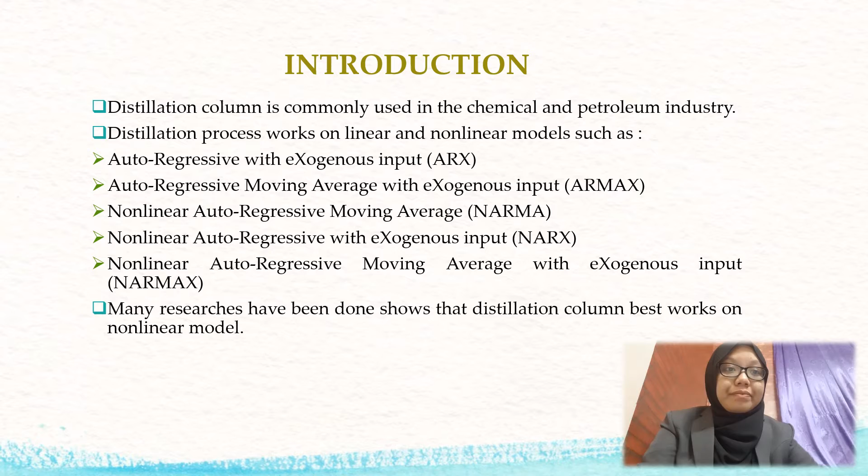Time-varying dynamic behavior is an increasingly essential field that has been developed for the non-linear and time-varying model for water temperature. It helps in prediction of the estimated accuracy.

The choice of input data is PRBS, pseudo-random binary signal, as it has a full spectrum of amplitude and frequency. Second is the multi-sine signal, M-sine, because it is sensitive and can detect small changes that occur.

The PID controller performance depends on its three tuning parameters, which are proportional, integral and derivative, to reach the transient response performance and robustness. Therefore, PID controller is implemented in the non-linear model for time varying to achieve the conventional control.

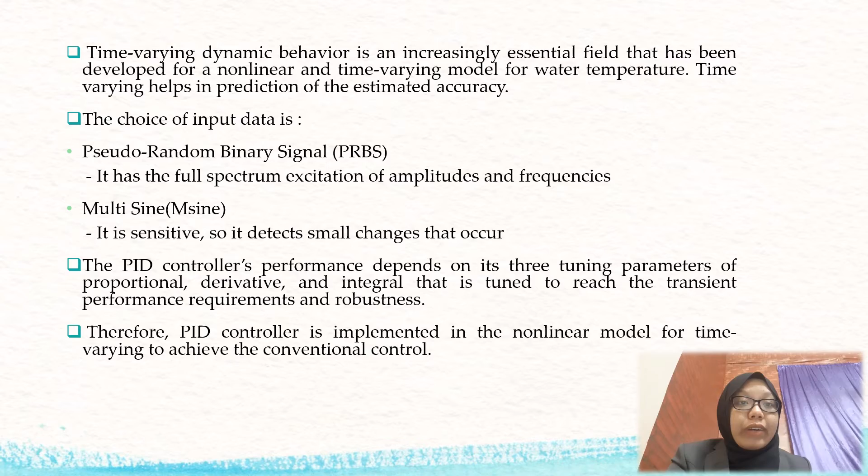Problem statement. It has been discovered that non-linear models give better performance and greater presentation compared to the linear model. Unfortunately, there are some drawbacks due to the validity in the input set with the use of a non-linear system linear method.

The time-varying distillation column is a device that has non-linear behavior and faces critical problems such as loss detection that cause it to be hard to explain the physical mechanism.

The distillation control also faces some problems and limitations such as difficulty in controlling the process and unsatisfactory control performance. Therefore, analysis on the NARX model of steam distillation process has taken place.

The implementation of PID controller is used to control the non-linear system and demonstrate the high controller performance of this project.

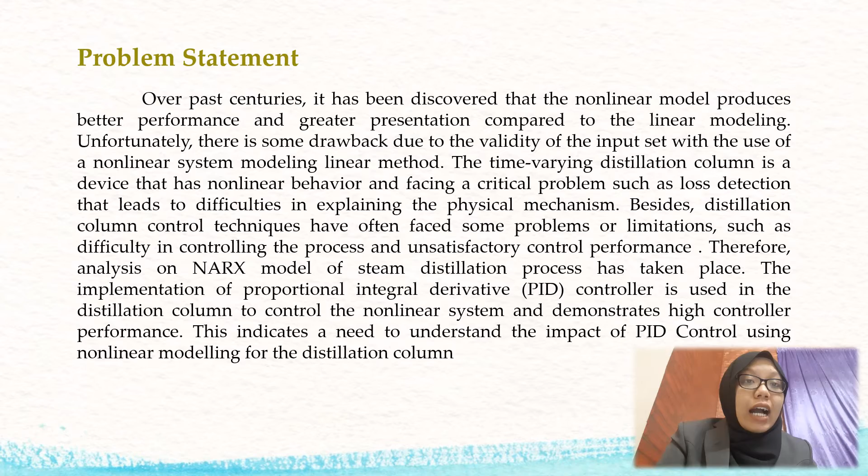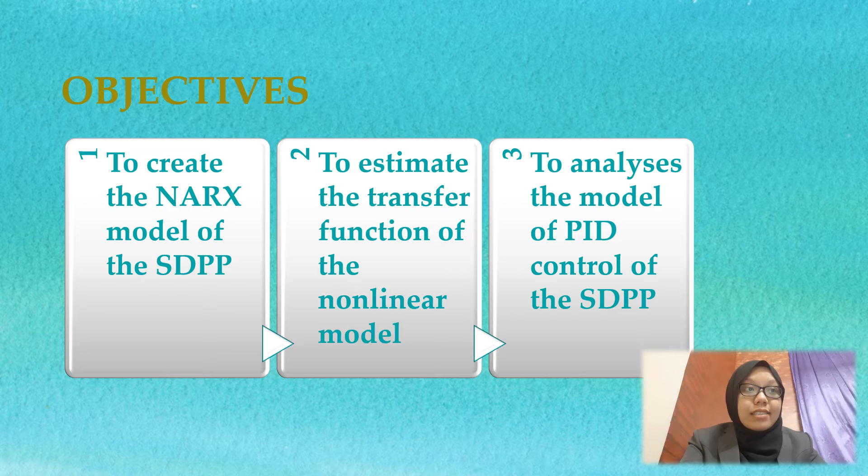The objective of this project is to create a NARX model of SDPP. Next is to estimate the transfer function of the non-linear model, and lastly to analyze the model of PID control of the SDPP.

For the methodology part, as you can see, there is a flowchart above. After start is experiment planning. Next is data collection, in which we obtain the highest best fit of the input data of each input. Next is selection of model structure by using the reformulated tangent method.

Next is model estimation of the transfer function to be used on the Simulink. Next is the model validation, in which we identify the value of Kp, Ti and Td from the transfer function, and if the model is accepted, implement the PID control so that the final result we obtain the rise time, settling time and percent overshoot of each input data.

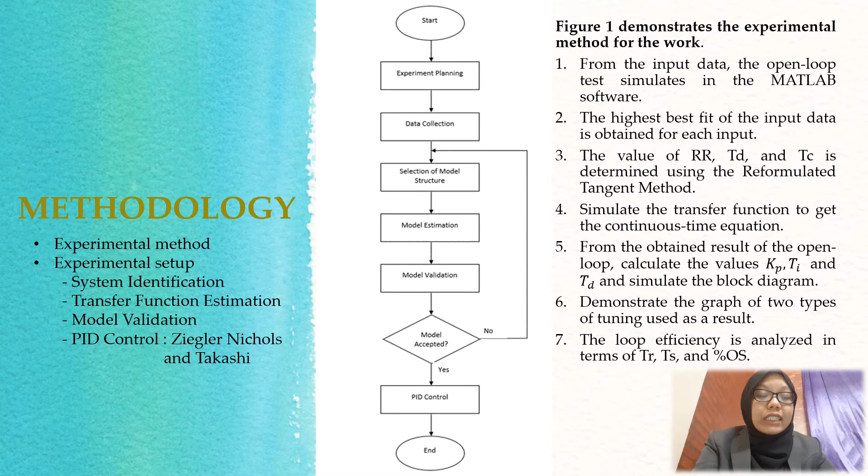For experimental setup, a steam distillation power plant SDPP with 240 volts was used with a specific sampling time for the immersion heating feature. The MATLAB software was used for plant integration and data collection for modeling purpose.

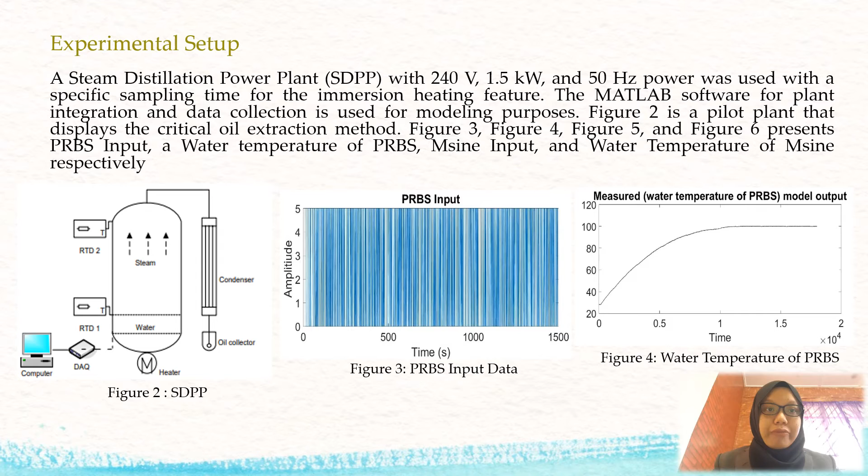Figure 2 is the SDPP plant that displays the critical oil extraction method. Figure 3 shows the PRBS input data graph, while Figure 4 shows the water temperature of PRBS graph. Figure 5 shows the M-sine input graph, and Figure 6 shows the water temperature of M-sine graph.

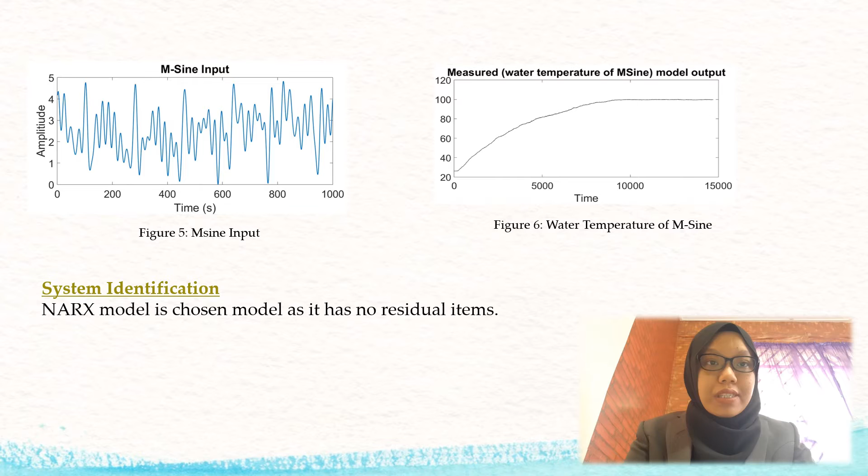For system identification, NARX model is the chosen model as it has no residual items.

For the transfer function estimation, the transfer function is estimated from the input time domain. The number of poles and zeros is adjusted several times in the system identification apps so that the simulated transfer function is in the right form. After that, the fitness percentage will be obtained, and lastly, the equation of the continuous equation will be obtained to use on the Simulink block diagram.

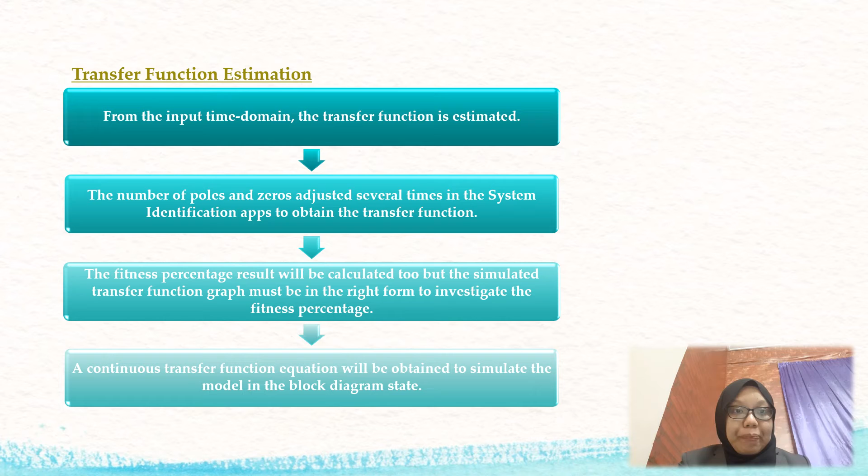The result was divided into 5 parts: the best fit and MSE result, the calculated transfer function, the graph of PRBS input, the graph of M-sine input, and lastly the tuning parameter result.

Here is the table of calculated transfer function values of Kp, Ti, and Td. The calculated values are obtained by using the Ziegler-Nichols tuning rules and Takahashi tuning rules at table 1 and 2 from the previous slide.

This page shows the graph of simulated PRBS input data. Figure 7 shows PID control PRBS input 0.1 for steam temperature graph. Figure 8 shows the PID control PRBS input 0.5. Figure 9 shows PID control PRBS input 0.8 graph.

From the PRBS input graph, it shows that the least amount of overshoot is on Takahashi with 0.5 band, and the fastest rise time is at Takahashi with band 0.5.

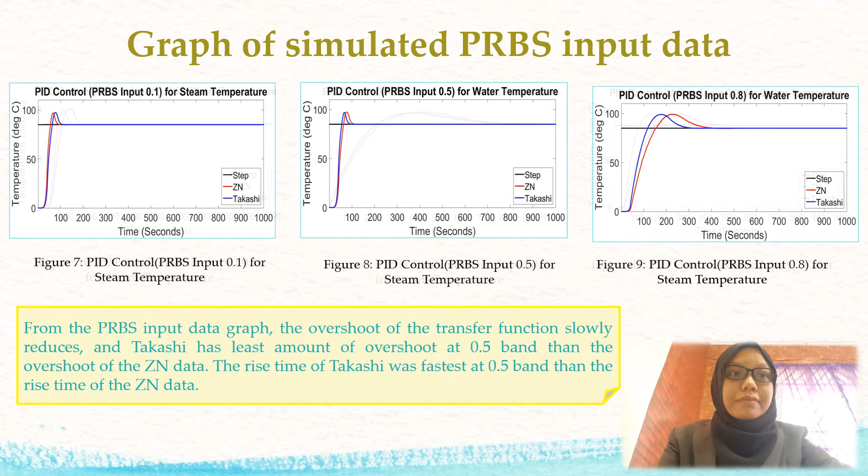Here is the graph of simulated M-sine input data. Figure 10 shows the PID control of M-sine input 0.1 for steam temperature graph. Figure 11 shows PID control M-sine input 0.5 graph. Figure 12 shows PID control M-sine input 0.8 graph.

From the M-sine input data, the least amount of percent overshoot is on Takahashi with 0.8 band, and the fastest rise time is at Takahashi with band 0.1.

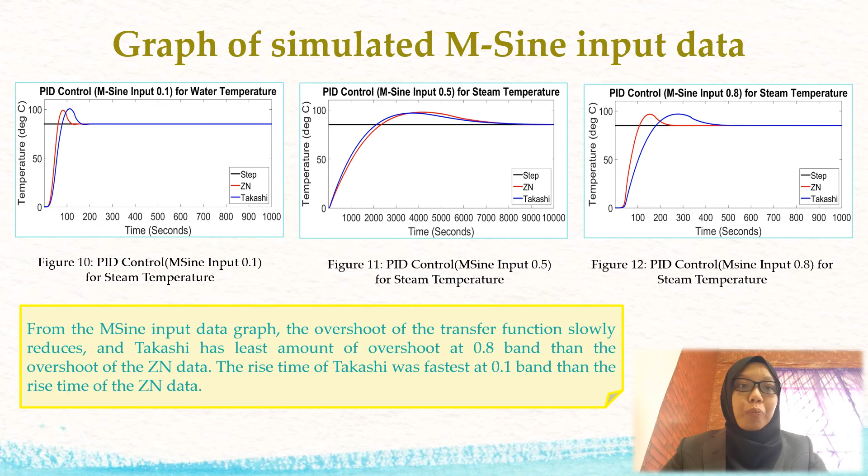For the conclusion, the nonlinear model and PID tuning for time-varying water temperature was presented. High fitness and low MSE results were produced based on various bands of PRBS and M-sine. Data of PRBS with band 0.8 and M-sine with band 0.8 demonstrate the highest percentage of fitness.